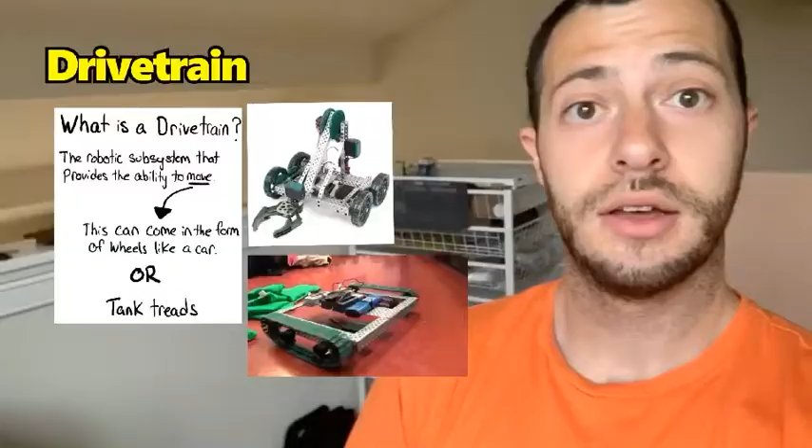Drivetrain is a robotic subsystem that allows a robot to be able to move, and there are two main ways in which these robots move. One is with wheels, such as the ones in the Clawbot over here, or tank treads, such as the one in the robot built over here.

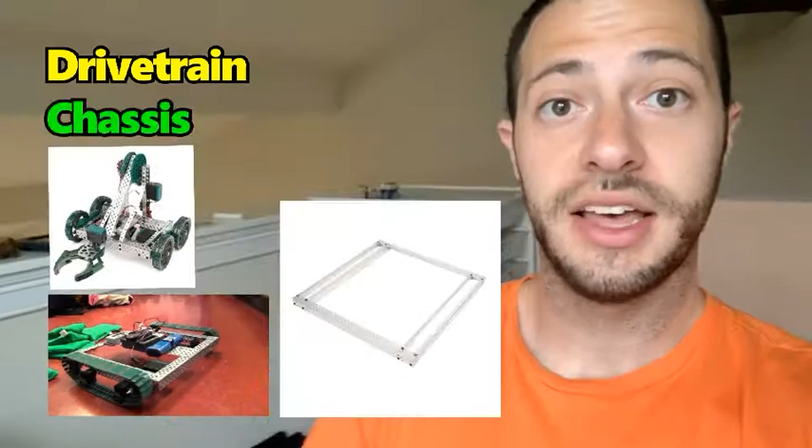Every drivetrain has something called a chassis, and that chassis looks like this. It's the underbelly of any robot or car, and it's used for the wheels to be attached. It can also hold the motors or anything else. For example, in the Clawbot over here, the wheels are over here, and the motor is right behind the wheels, attaching both the wheels and the motor.

Just a quick note about chassis - you can build them in different ways. For example, this one over here has a wider chassis, which is going to affect the way in which it turns, whereas this one has a longer chassis. So think of turning left or right - which one do you think is going to be able to turn more easily?

By the way, you see how I used alignment to line these pictures up? Looks good. Throwback.

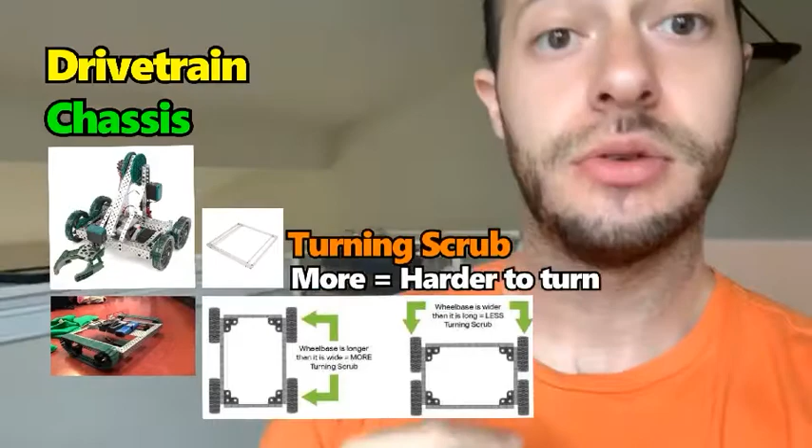Alright, so to figure out which one can turn more easily, it has to do with an idea called turning scrub, and the more turning scrub it has, the harder it is to turn. So this longer one has a higher turning scrub, so it's more difficult to turn, where this one has a lower turning scrub, making it easier for it to turn.

Alright, so the way you're going to be using the drivetrain on VEXcode VR, as soon as you get to the website, on the left-hand side, you'll see code, and you'll see a lot of different options of code that you can go through. The top one has to do with the drivetrain, which you now know what it is, which has to do with going forward, right, heading. You can set the speed.

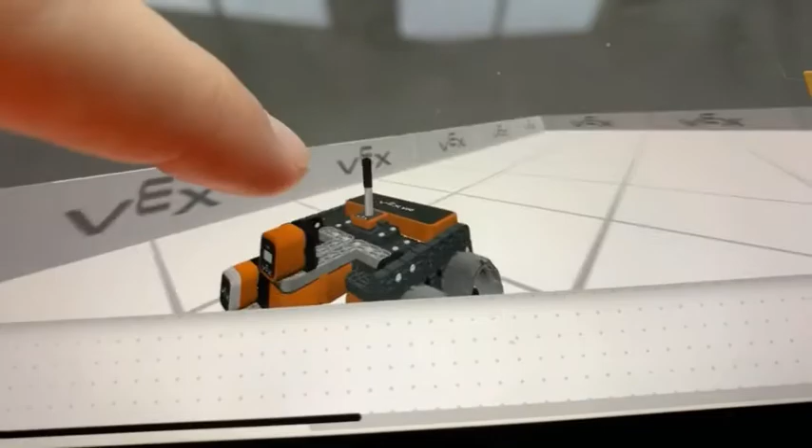It has to do with the movement on this robot. So if we were to open the playground, we would see our little robot here. Let's look at him in 3D with this button. Make it bigger - so our virtual robot has wheels on the drivetrain, and the chassis is kind of a rectangle shape. You guys are going to have the chance to code him to complete different challenges.

What's that, little buddy? Oh, he wants to tell you guys about his sensors. So there are a lot of different sensors for the Vex parts that we do in the classroom, but I'm only going to go over the ones the VR guy can do.

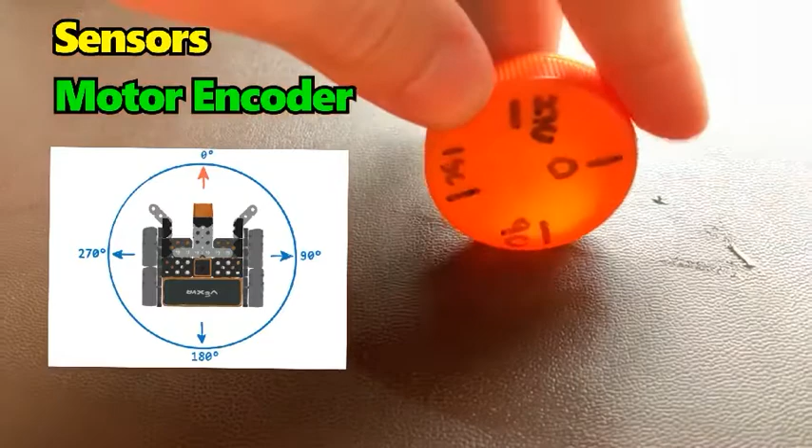So the first sensor is the motor encoder, and this is able to detect 360 degrees in the wheels, specifically the revolutions, the movement of those wheels. Imagine this Gatorade top was the wheel of the car - it's able to determine if the wheel has turned 90 degrees, 180 degrees, 270 degrees, or a full 360 where it's back to zero on top.

This is really important. If you only want it to move a little bit, you can code it to only turn 90 degrees, which is like 1/4 of a movement of the wheel. So instead of saying to a car, put your foot on the pedal for 3 seconds, you would tell the motor, which is encoded by the motor encoder, to move for a certain number of degrees.

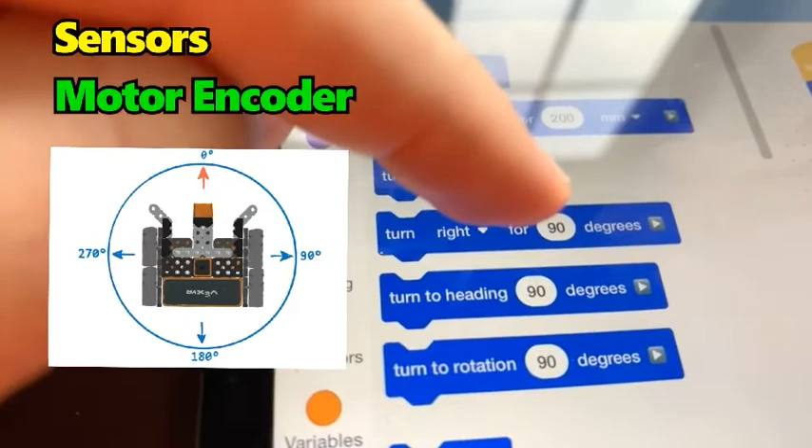So under the drivetrain, when you go over to turn for degrees, that motor encoder is telling it how many degrees it is. So when I tell it to turn right for 90 degrees, let's take a look what would happen. But let's not do this in 2D, let's turn this into 3D mode.

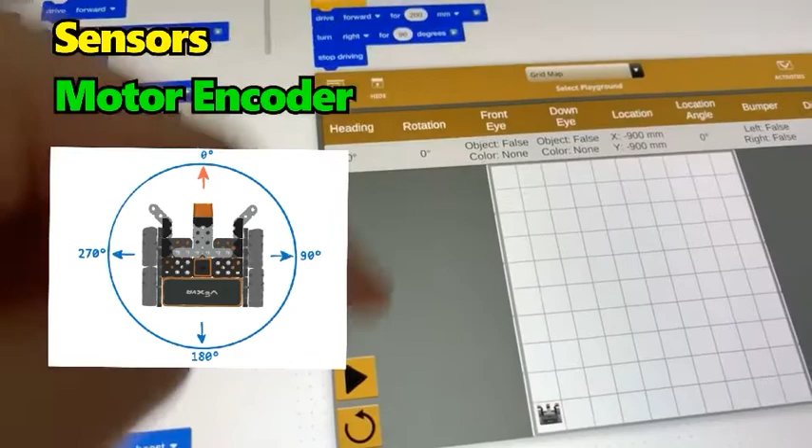So we hit play, and we'll watch the robot move, and as it turns over here, what you should notice is that its rotation moved to 90. Keep your eye on the rotation right here. So when we play this, you'll notice that it's going to move, and its rotation is going to go all the way to 90, and the motor encoder is what's letting that happen.

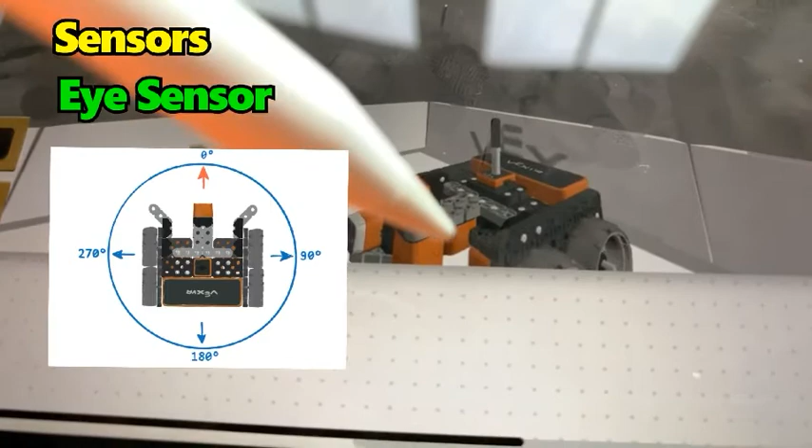The second sensor is called the eye sensor. This sensor right here allows this VR guy to draw an infrared line from here all the way to the end to detect the distance it is from the end, or at least the next closest object or wall. You'll notice as it moves, this is going to change.

And it continues to change as it moves, as you can see over there. The eye sensor can be found under sensing, the tab with all the blue blocks. The eye sensor is responsible for all these commands, and you can even determine using the front eye if it's close to an object or if it detects a color, and lots of stuff.

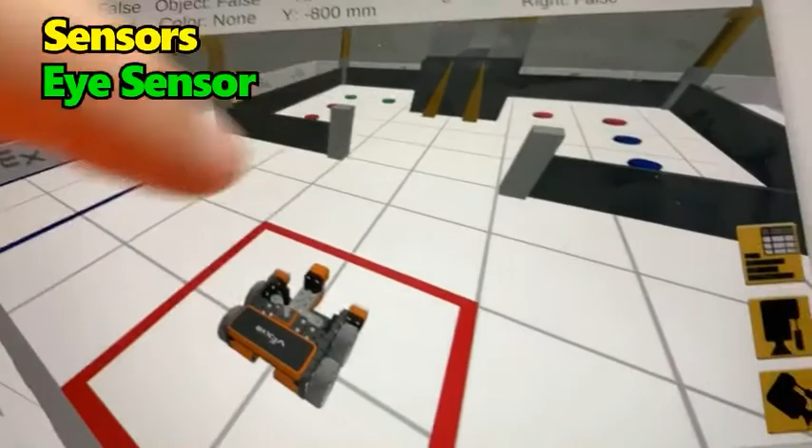This sensor is especially helpful in a map like Disk Transport, where you have red disks, and you can use that sensor to determine when it is able to see one of those disks. It can detect many different colors.

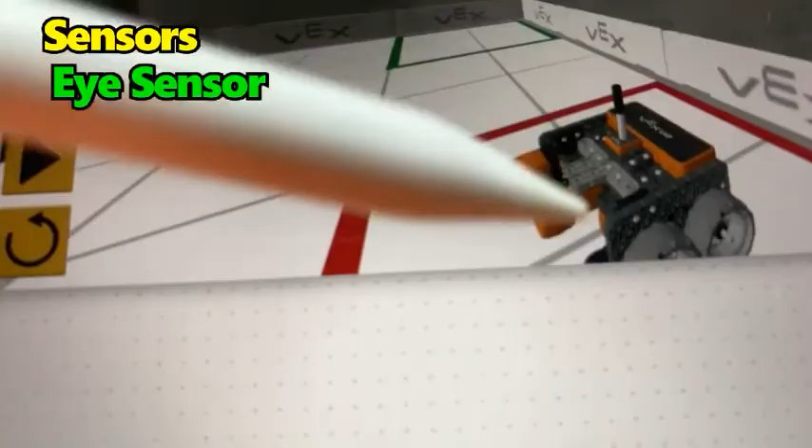One final thing about the eye sensor is there's actually two of them. This one faces forward, and this one faces down. You can see what they read up top, front eye and down eye, and it can be used to help detect colors or objects if they're in front.

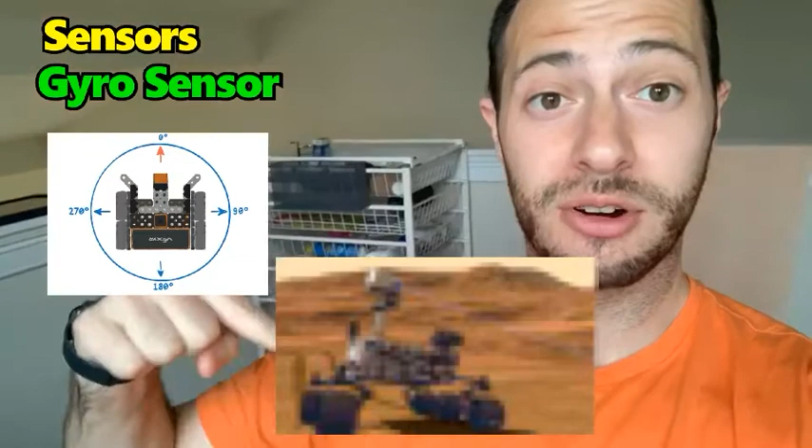The next sensor is called a gyrosensor. This thing is super important for allowing something to travel straight and make accurate turns. Imagine how tough it would be for the Mars Curiosity rover if it didn't have a gyrosensor and just fell into a crater, and all that time and effort was lost. Being able to detect where and how many degrees you're turning is very important.

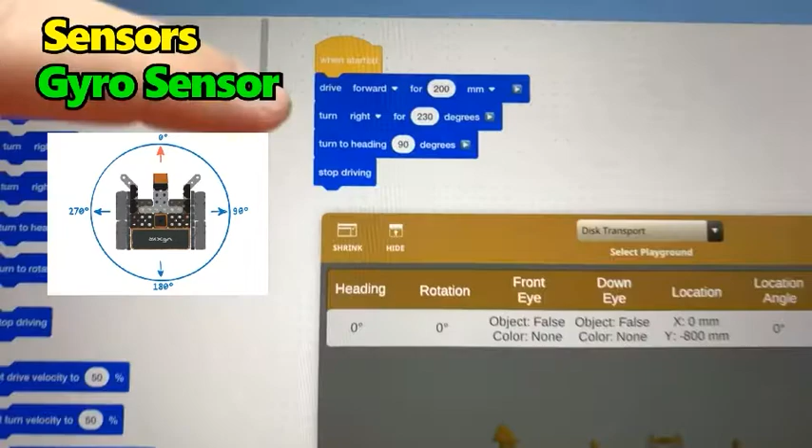So if I were to make it turn for 230 degrees, the sensor over here would show you the heading and rotation all the way to 230, and you notice it turns precisely. You can even fix your turn where after that 230 degrees you want it facing a certain way, you can set it to that by turn to heading.

So if you can see over here, it's going to turn to 230 degrees, and then it auto turns back to 90 degrees over here. That would be important if we wanted to go that direction afterwards. Gyrosensor, very helpful.

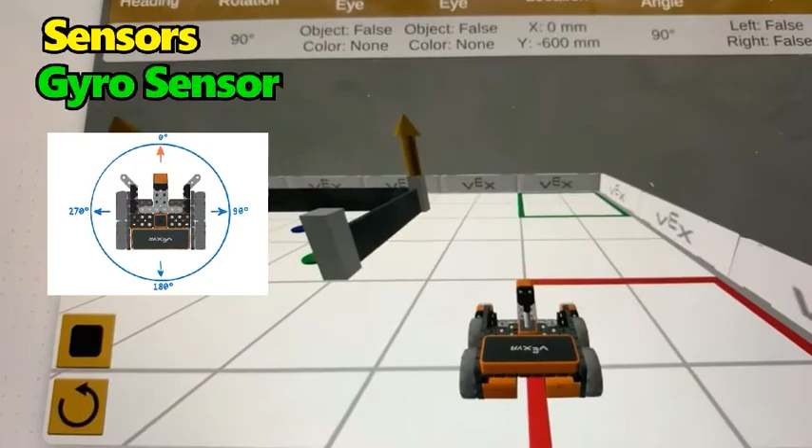The second to last sensor is called the location sensor, and it has to do with the XY plane like the one over here. By the way, an easy way to remember that: the y-axis, if you nod your head yes, yes, up down, like that. X, on the other hand, means no, so you say no like this, and that's the way of the X.

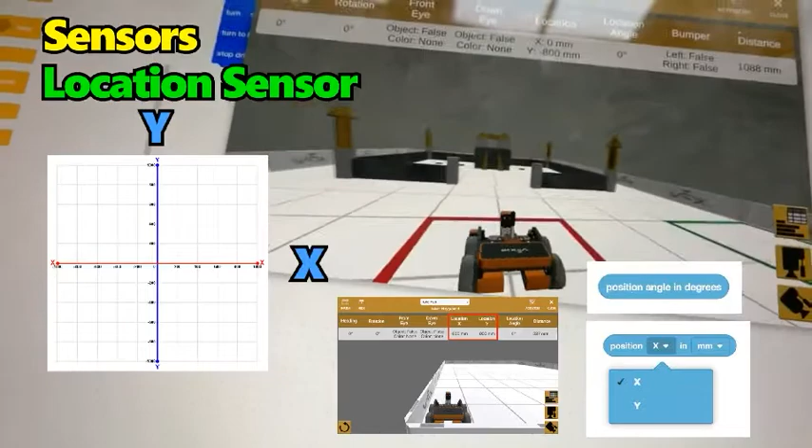So this sensor allows you to figure out on the map where you are. When we are positioned over here on the map, it says our location is x0, y negative 800. So if we look at the whole grid, the origin is right here, and right now we're down 1, 2, 3, 4. So each block is worth 200 if you do the math.

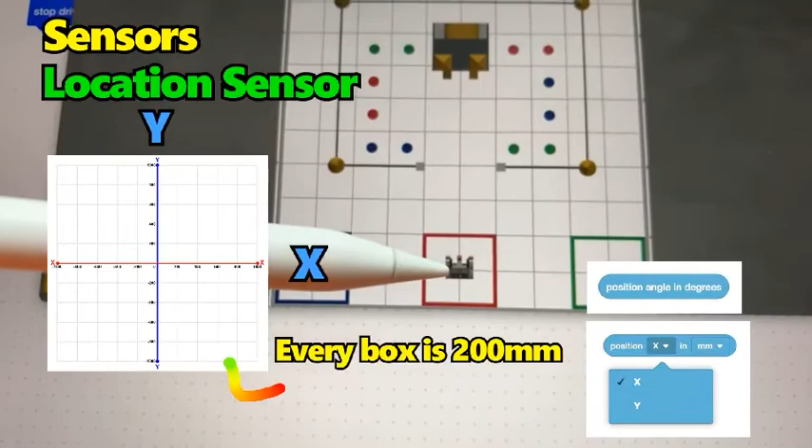So if we wanted to go from here to the center, we would have to go forward 800 millimeters. We can go over to drive, and set it to go forward 800 millimeters, changing the 200 to 800. And if I wanted to delete the stuff we had before, you can hold down on the code, and it will say delete block, and you can delete the blocks by holding down.

So now that it's going 800 millimeters, we can see that our little robot's going to go to the origin, the center over there. Hooray. By the way, the coordinates are measured by the middle over here, in other words, the pen's location.

Which pen's nicer? Jokes! All right, and the final sensor is bumper sensor.

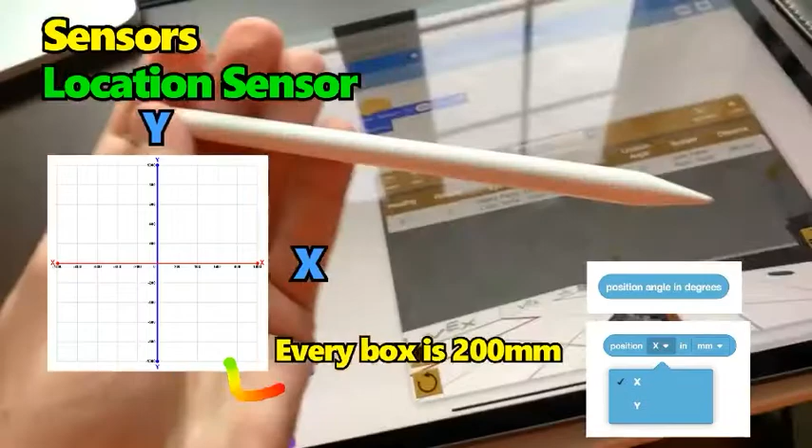The bumper sensor can be found, there's two of them on the front of the VR robot, which looks like that and that. This thing's basically a switch. When it's pressed, it will read a value either on or off, 0 or 1. 0 means it is not pressed, and 1 means it is currently pressed. It will read false if it's 0, or not pressed, and it will read true if it is pressed. So if we were to bump into a wall, both of those would read what?

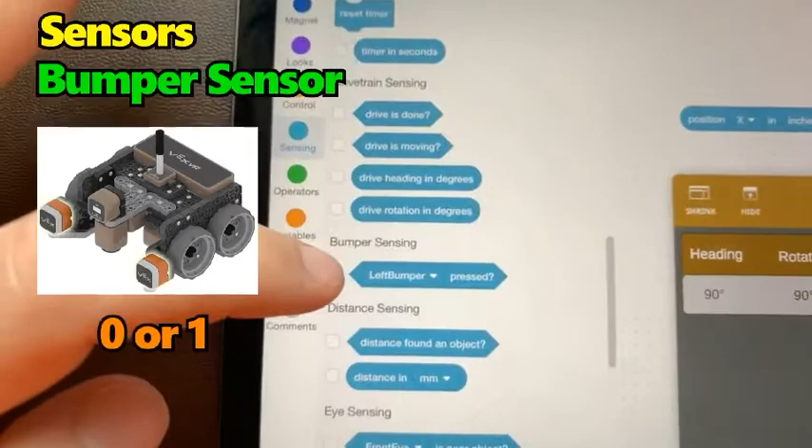Yeah, true. And this is under sensing, the blue one, and you can see over here left bumper or right bumper. To use this, you would drag this left bumper into the diamond over here in the wait command. You connect it to the edge, it will light up, and it will snap in place.

So this blue thing is an example of something called a Boolean block, which is essentially something that waits for a true or false condition, reporting true if the bumper gets hit or false if it's not currently pressed. You'll know it's a Boolean block whenever it's a hexagon, a hexagon with 6 sides, and those are Boolean blocks. They fit inside all of these control commands that have those hexagons for them to be put in.

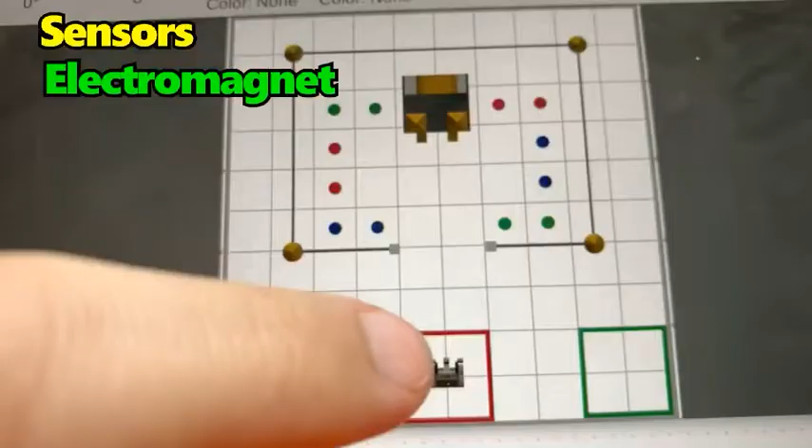And this one's not really a sensor, but the last thing is the electromagnet, located below the gyrosensor right here. Basically, when the magnet is on, it can pick up one of the electromagnetic disks in the game Disk Transport. So when the robot is on top of one of these, you can turn the magnet on and collect it so you can move it.

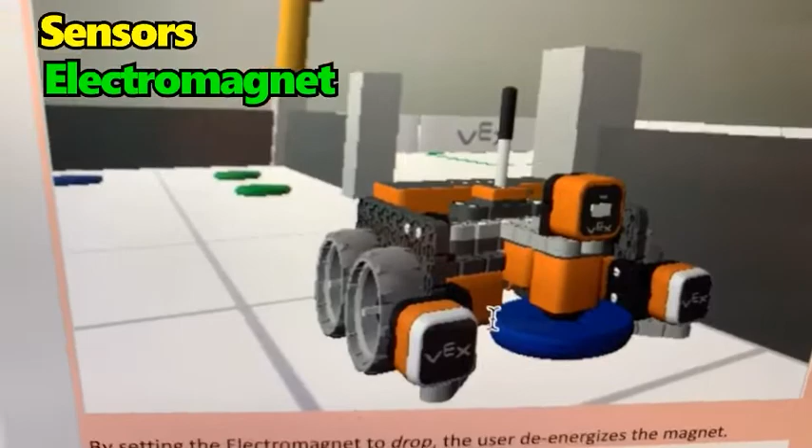And you can find that by just clicking on magnet right here, and there's only one command, and you can boost it or not boost it. When picked up, it will look like this. You can pick something up or drop it like that. And you dropped it. And that is a full rundown of everything you need to know for VEXcode VR.